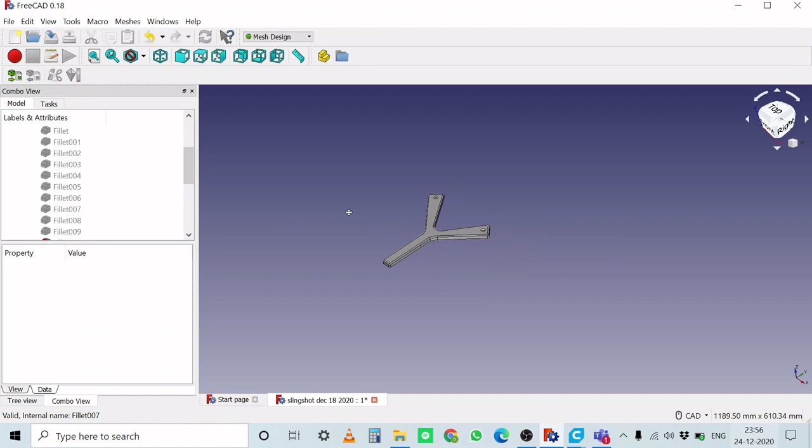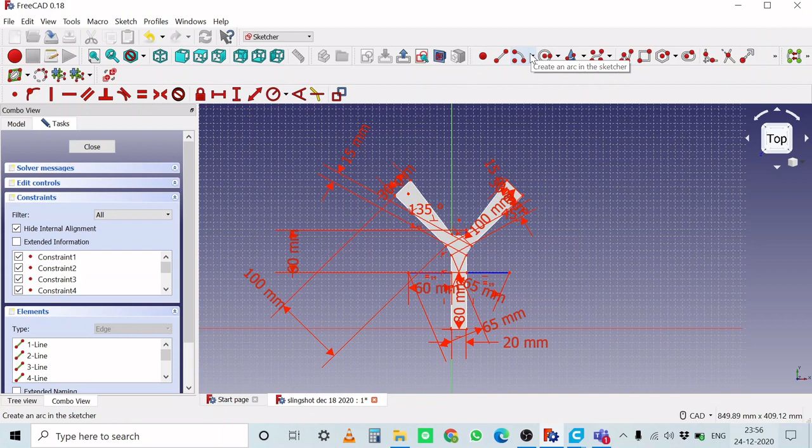For this part, first I made this sketch with various dimensions. Basically three pairs of straight lines I created and joined them using a straight line and a curve to create an arc feature. After that, I padded this whole sketch to a height of 10 millimeters.

Finally, I filleted this whole structure, as you can see, to make these edges smooth.

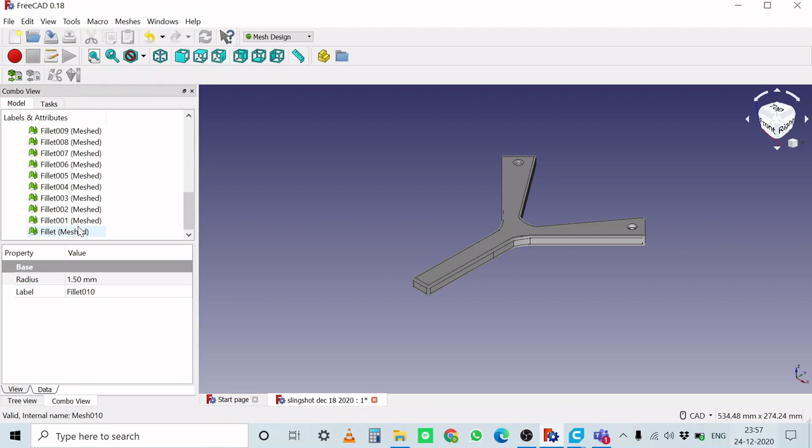Finally, I did the mesh design part, for which I created a mesh design and then created the mesh from the shape, and the meshes of the 10 fillets are as follows. This is the final part of the mesh that came out, and I saved it finally to the STL file.

After creating the .stl file, we imported the file from the files option, open files, into the Ultimaker Cura software, where we can convert that .stl file into G-code for its final processing, so that we can print it in 3D printing after making the G-code.

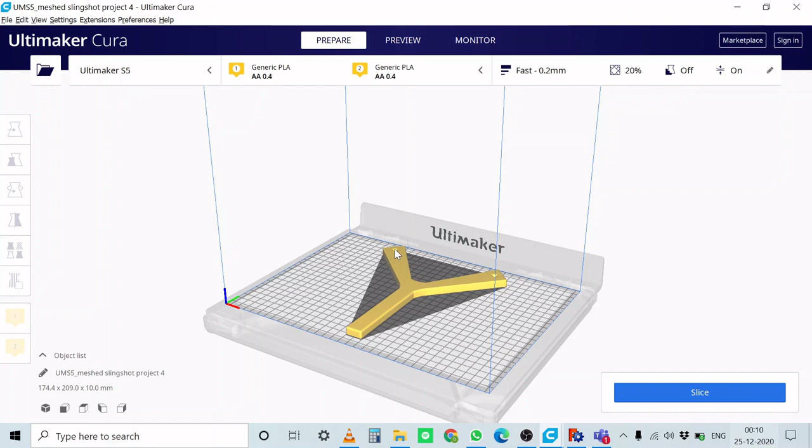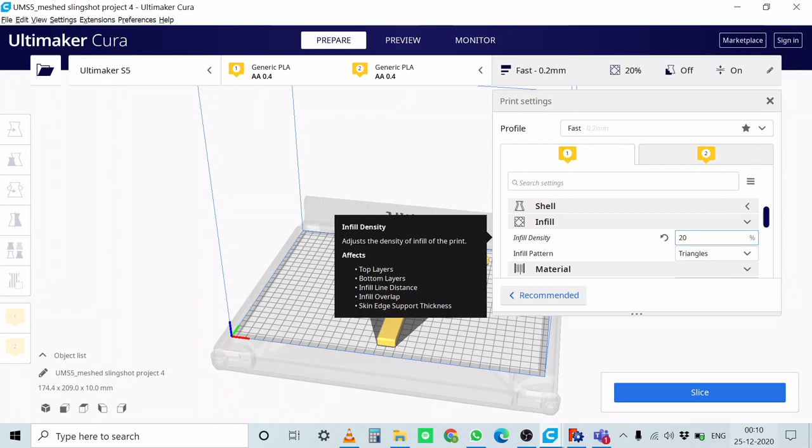After importing this .stl file in Ultimaker Cura, we set the print settings as follows. First, we use the plastic layer mold, with the height to be made as 0.2 mm thickness, and after that we use 20% infill density with a triangular infill pattern.

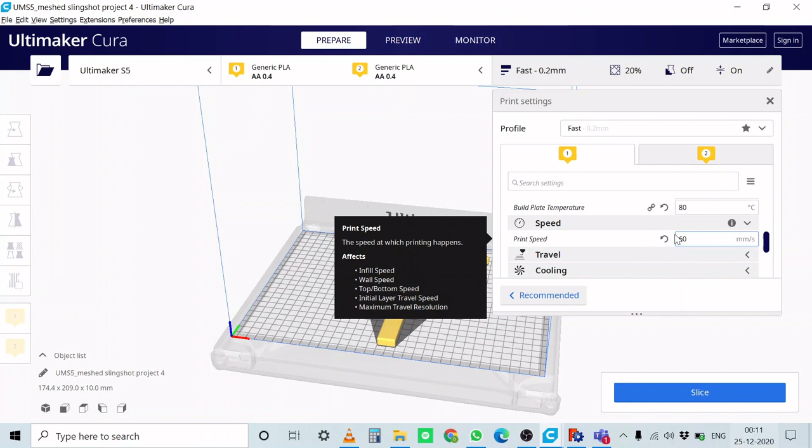For the print temperature of the extruder, we use 200 degrees centigrade, and the build plate temperature where the molding is to be made is 80 degrees centigrade. We use print speed as 60 mm per second, and finally the build plate adhesion type is brim, using extruder 1 to complete this structure.

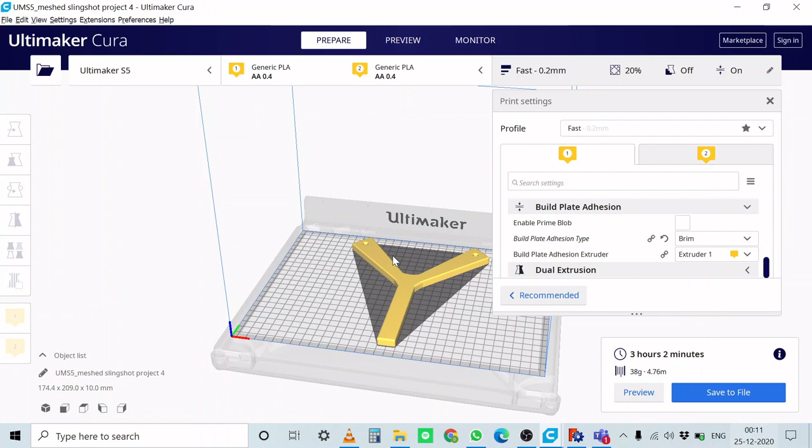After all these print settings, when we slice this print, we see that it would take an estimate of 3 hours and 2 minutes to complete this structure, with 38 grams of plastic needed and 4.76 meters of plastic mold needed.

Finally, we can preview how this print will be made. First the brim adhesion is made, then the base of the slingshot with 2 holes. For the vertical part, first it makes the 20% triangular infill, and finally covers the top with a plain surface to complete this slingshot.